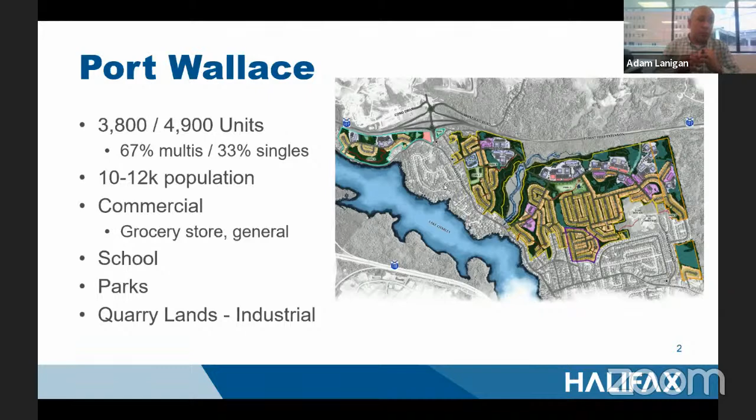Zooming in on the neighborhood a little bit here, I've highlighted a curvy route through the middle of it, and this is kind of the main spine of the development. Most of the commercial uses and the multi-unit buildings will be focused on this main spine street. It's basically an extension of the existing Avenue Du Portage on the east side, and it snakes through the development to connect to Waverley Road on the west side.

So that's a stretch of about 2.5 kilometers. We call it, in technical terms, a minor collector. It collects a lot of traffic to bring it to other places, to connect to major routes like Waverley Road, Montebello, and others in the area. It's going to serve all of those uses along those roads, all the residential and commercial uses, the schools, the parks, and all of that will connect to this road.

So we really want to do something special here.

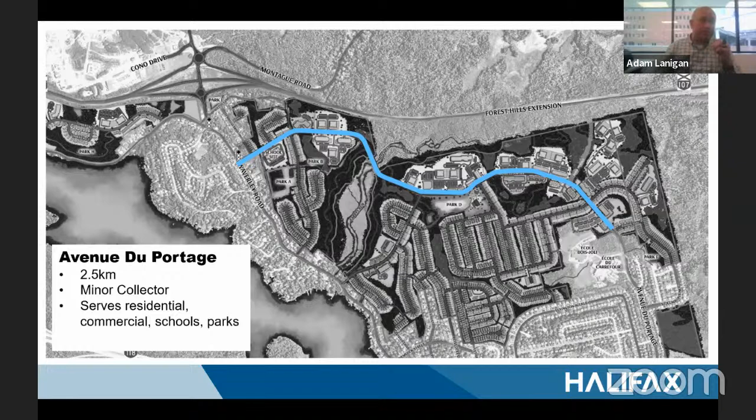So to this point, before we get into showing you what we're talking about, just to review a little bit, we've been discussing these ideas with the developer. They're very deep into the planning and design of this neighborhood, so we're trying to get them to design around this concept along that main spine route. We've internally developed a draft cross section, what the road kind of looks like from left to right, that we're playing with, and that'll be adjusted with your feedback.

We've had a bunch of internal discussions with a lot of other HRM departments, our colleagues in traffic and road safety, Phil's other colleagues in the design department, construction, road operations and maintenance. We've talked to all those people, and in the last 2 weeks we've met with a range of other accessibility stakeholders, mainly focusing on vision issues on the 8th and the 16th, and got a lot of good feedback from those folks as well.

So far to date, it's been all pretty positive feedback from the developer, from our other colleagues, and the other stakeholders we've talked to. No showstoppers so far. So it's all been good, and we're hoping to get a lot more of that feedback from you here today.

Upcoming, the concept that we'll be showing you here in a second comes from a facility that was constructed recently in Nanaimo, BC. So we're trying to connect with staff there to see what lessons they've learned since the facility has been open. And we're looking to modify the starting concept from their work and what we've got in-house here, based on the feedback we're getting from all of the stakeholders, the internal groups, the accessibility groups, and others.

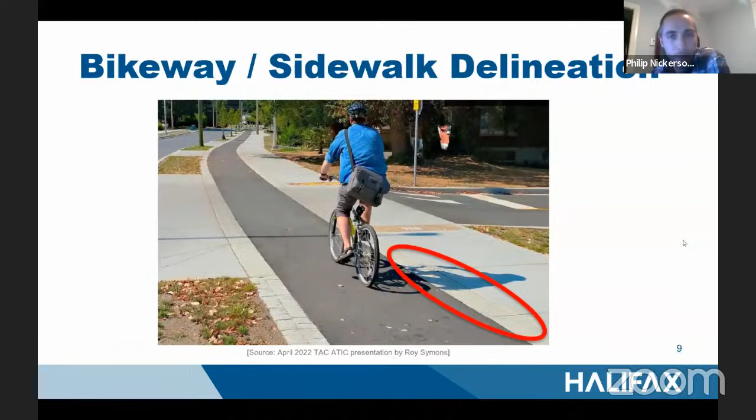So the main reason for this delineation is to separate the bikeway from the sidewalk and prevent pedestrians from inadvertently entering the bikeway. This is particularly important for those who have no vision or low vision, and ideally where we have space, this would be a sod buffer. If you have a meter or more of space, you can make this sod, and you'd have very detectable delineation, which also serves as a zone for hydrants and utility poles and whatnot.

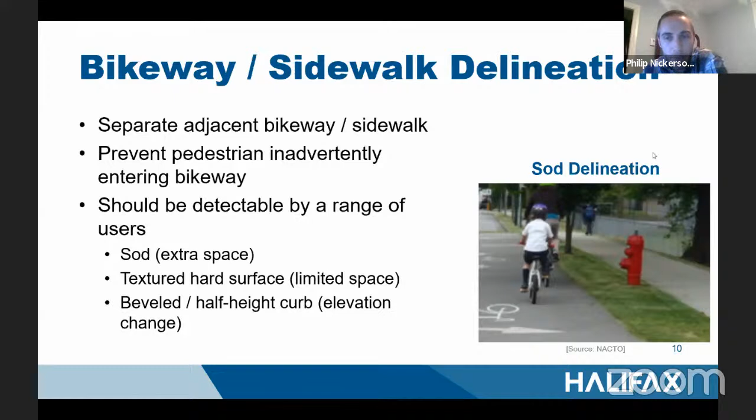In this cross section, the sod buffer is shown between the bikeway and the roadway to provide that separation from the vehicle traffic. So here we have less space, so we're looking at textured hard surface delineators, as well as a beveled curb or a half height curb to provide a bit of an elevation difference between the bikeway and the sidewalk, which I understand is more detectable for cane users. Next slide, please.

So here are three examples of how this delineation could look that we've come across. The image on the right shows this tactile delineation at the same level as mentioned. It's a bit of a rough stone pattern, not sure if it's pavers or stamped concrete.

However, it would be applied over a long distance, so it's important that we have good feedback before we apply something like this over such a long corridor.

The image on top shows something installed at the intersection of South Park and Sackville Street, where you have a flush bikeway next to sidewalk, a raised bikeway next to a sidewalk. It's a bit of an alternating paver stone tactile pattern where the linear pavers alternate back and forth to provide that separation. The image below shows a beveled curb, which could be applied here, or perhaps a more vertical curb, but smaller than a standard 6-inch curb—in the 2 to 3 inch range—where it would drop down from the sidewalk to the bikeway.

Now just looking at the attention TWSIs, which we see are installed around the city, all around HRM. Recently, here's an example of how they're applied on the Nanaimo Drive, the Nanaimo Metral Drive project. They're placed on both sides of the flush or raised bikeway to warn pedestrians about entering a travel way, as well as at the curb, which is how we're more used to applying them around here.

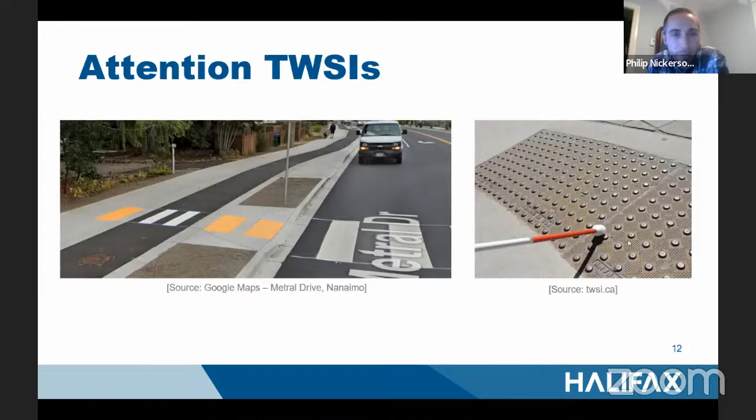And this is the recommended treatment. However, we'd like to get some feedback on how these can be applied and improved. Next slide, please.

As I mentioned, these attention TWSIs are meant to be a warning that you're about to enter a travel way, both for bikes and for vehicles. It's not meant to indicate where to cross, or show who has the right of way, because the Vehicle Act states that cyclists have to yield to pedestrians, regardless of whether these are present.

They can be installed at all new or retrofit pedestrian ramps across HRM, and of course we'll be looking to apply them here as well.

And we've heard back some initial feedback about some challenges. So if they're applied or installed on both sides of the bikeway, and there's no ramp there, that could be a challenge for those who have low vision or no vision, that you're about to step out into a travel way. It can also become a bit challenging or confusing if you have lots of these tactiles in a small area for navigation.

Next slide, please. So to help with that, the tactile direction indicators are to provide a wayfinding cue for more complex built environment street navigation areas.

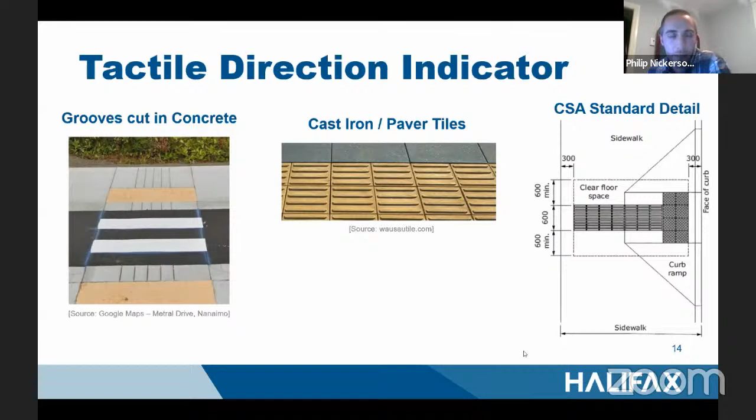So I've gone over a few of the options of how these might look. But it's important to note that the intention wouldn't be to use these at every intersection. If the crossing is typical, linear, and well delineated, then there wouldn't be a need for these TDIs, tactile direction indicators. It's more for complex environments.

So mid-block crossings where it's not obvious or clear that there would be a crosswalk there, or perhaps at transit stops to line you up with the front door of the transit where the bus stops, open plazas, and those types of things—where there's not clear delineation from one side to the other of where you're supposed to be walking. They would always lead to an attention TWSI before you step out onto the curb or onto a bikeway or travel area.

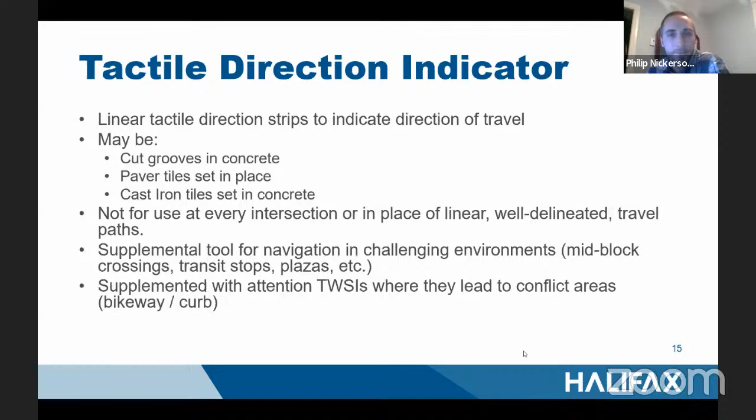So this image shows how this was applied in this situation. It's a little difficult to see, but those linear grooves are cut on the right side of the screen. Walking down, the idea would be feeling it with a cane or those grooves to indicate that there's a mid-block crossing here, and then attention tactiles before crossing the bikeway and then crossing the street.

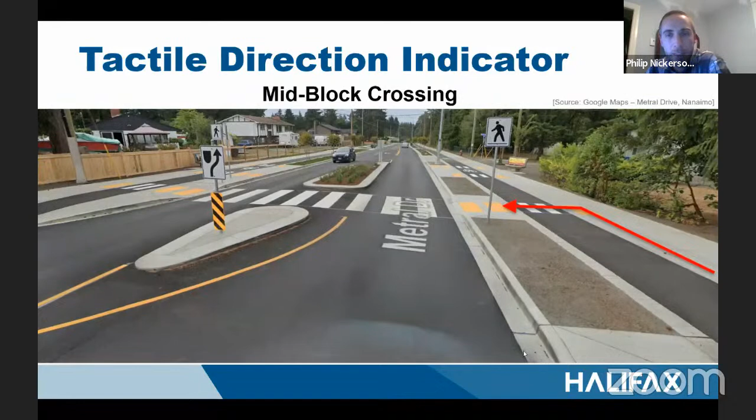The raised crossings that Adam mentioned earlier. On this project, they continued the sidewalk and bikeway straight across local street crossings. The idea is to give preference to cyclists and pedestrians, making it more comfortable for them to cross without having to slow down to street level and back up, and also help slow down vehicles crossing or turning along the bikeway or sidewalk here.

A few notable features: the attention tactiles are placed on either side of the crossing. However, in this example, there's no dip down to the curb like you'd normally have. So one idea, from feedback we've gotten, is that it might be good to have a partial dip down, a partially raised sidewalk and bikeway that would split the difference between the road and the sidewalk, providing a bit of a ramp that would indicate you're stepping into a roadway for those with no vision or low vision.

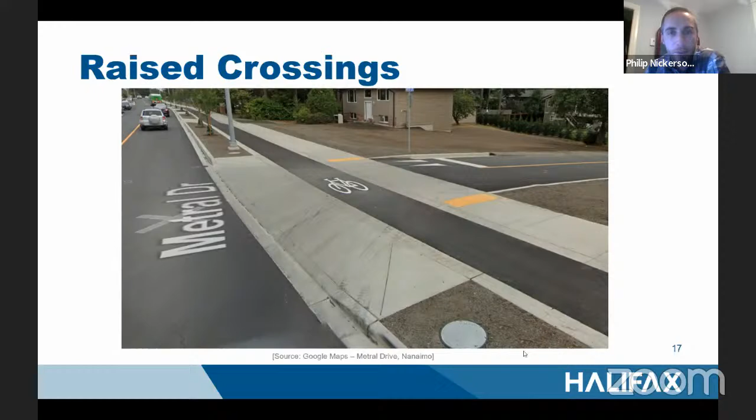As well, perhaps having a dropped curb that circles around would also give a bit of an indication that you're stepping onto the road.

So summarizing some of the points: slowing vehicles down, emphasizing priority to cyclists and pedestrians. These raised crossings, normally at a local street we would wrap the curbs around, whereas this gives emphasis that approaching vehicles should really be careful, slowing down and looking for pedestrians and cyclists. Some of the challenges noted before, I'd be interested to get some feedback on how this might look, how we can make it work for everyone.

Next slide, please. Transit stops.

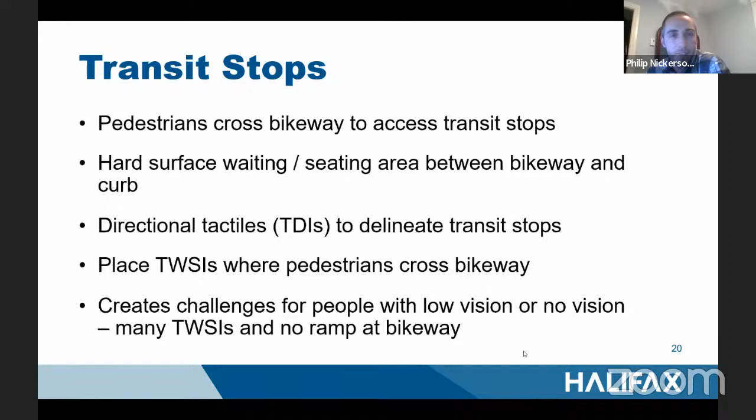I guess, do you want me to take over here, Phil? I think that was the plan, yeah.

Sure, okay. Phil walked through a lot of the details. There are a lot of pros to this design that we like, and also a few cons. One thing we're trying to achieve everywhere in the city is to get physical separation as much as we can from cars for people who are walking, rolling, and cycling. We have an improvement here over the typical multi-use path, where there are designated cycling and walking areas to reduce conflicts on those facilities as well, and hopefully keep people more comfortable.

The raised crossings and that continuous, consistent design that Nanaimo specifically applied - this corridor is at least 5 or 6 kilometers long, and it gives you that consistency. We want to give priority as we are trying to promote people to walk, bike, and take transit as much as possible for their daily trips. It does provide some advantages, especially in retrofit situations where we need less right of way. That's what ROW is.

The road can be narrower if we can provide that narrow delineation or some small elevation change to indicate the facilities there. We can squeeze this into more parts of the city. There are advantages for maintenance and snow clearing too, since having that consistent elevation or small elevation change makes it easier to get the snow across onto the shoulder.